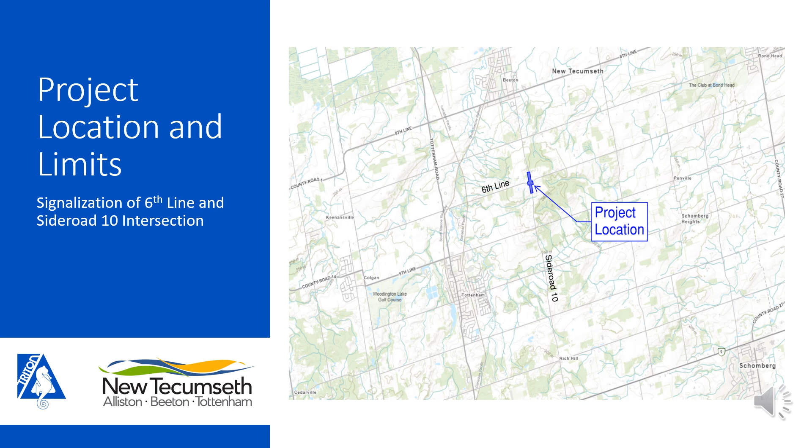The project is located on Side Road 10 at the intersection of 6th Line, just south of the community of Beeton. The limits of work measure approximately 500 meters on Side Road 10 to accommodate left turn lanes and approximately 100 meters on 6th Line.

The town undertook a municipal class environmental assessment in 2020 to identify and evaluate alternative intersection improvements at the intersection with the objective of reducing the potential occurrence and severity of accidents and collisions resulting from geometric and operational deficiencies within the study area. A link to the assessment documents is included on this slide.

The assessment concluded that impacts to the environment were too severe to improve the roadway to an arterial road design standard, including the minimum sight lines for a posted speed limit of 80 kilometers an hour. The recommended solution was to signalize the intersection to provide protected movement through the intersection and address sightline issues. Dedicated left turn lanes were also recommended to be constructed.

Side Road 10 is a 2-lane arterial road with a posted speed limit of 60 kilometers per hour within the project limits. 6th Line is a 2-lane minor collector road with a posted speed limit of 60 kilometers per hour within the project limits. The existing average annual daily traffic on Side Road 10 is 3,500 vehicles per day, and on 6th Line is 500 vehicles per day.

The road surface is in a deteriorated condition, and the town of New Tecumseth's 2018 Road Needs Study update, completed by R.J. Burnside and Associates Limited, has identified this section of Side Road 10 to be pulverized and resurfaced in the 1 to 5 year time frame. The link to the Road Needs Study is included on this slide.

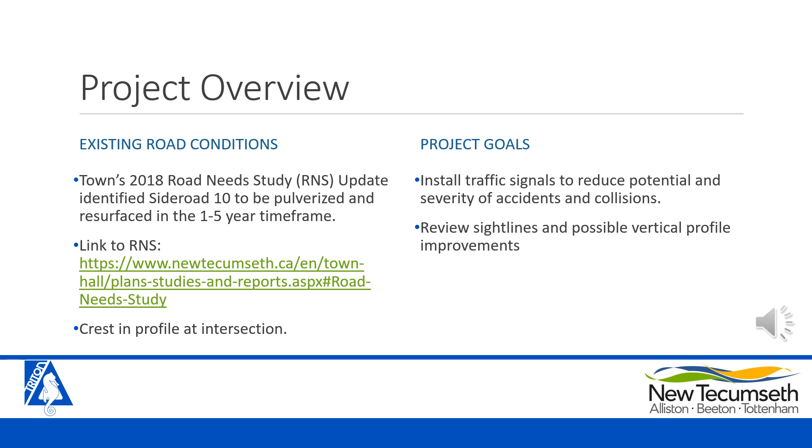There is a crest in the profile of Side Road 10 at the intersection. During design, a review of the profile was undertaken to see if any improvements could be made to the sight lines on the approaches to the intersection. The existing profile on Side Road 10 makes it difficult to turn from 6th Line onto Side Road 10 due to insufficient sight lines. The Municipal Class Environmental Assessment reviewed alternatives to revise the profile to meet standards for a 80 km/h design speed, but concluded that it would severely negatively impact the adjacent properties and environment.

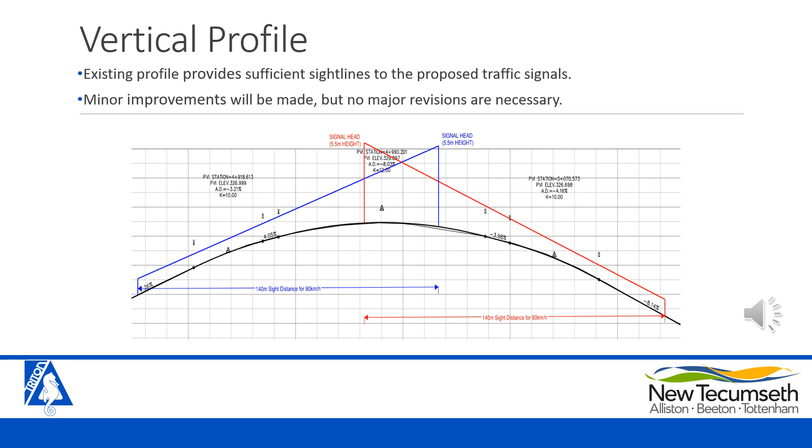As shown on this image, the existing profile will provide sufficient sightlines for an approaching vehicle to the traffic signal heads that are 5.5 meters above the ground. These sightlines do meet for an 80 km/h design speed, and no significant revisions to the profile are proposed.

Side Road 10 will be widened to accommodate left turn lanes at the intersection. The proposed road cross-section will follow the town standard for a 20-meter right-of-way, which includes a 3.5-meter lane in each direction, a 3.5-meter left turn lane, and a 1.2-meter fully paved shoulder on each side. A fully paved shoulder adds value to the road, reduces the maintenance costs, provides additional pavement width for cyclists and pedestrians, and will also provide extra pavement width for vehicles to pass large oncoming farm machinery.

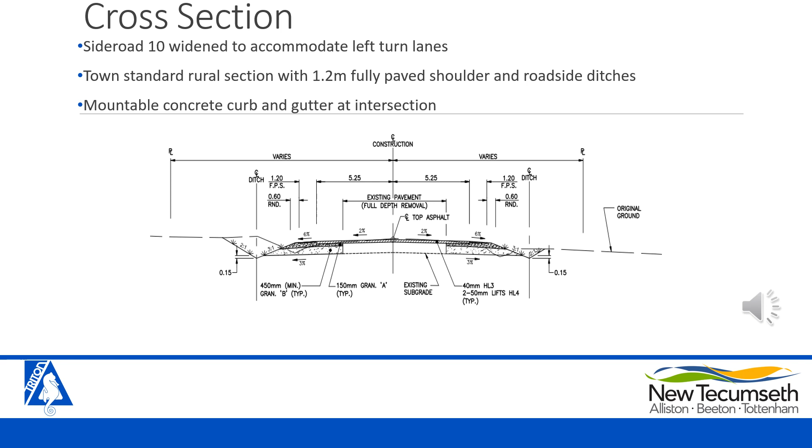The existing road asphalt will be pulverized and remain in place. The road widenings will be fully excavated with new granulars placed and compacted to accommodate the left turn lanes. Drainage will be provided by new roadside ditches and flow to the existing outlets. The typical section shown on the slide illustrates the new road in the area of cut. Additional typical sections are included on the design drawings. The intersection is proposed to have concrete mountable curb and gutter around the radii with asphalt boulevards behind the curb.

Concrete sidewalk ramps and tactile plates will be provided at each crosswalk. Crosswalks will be provided between each corner, and accessible pedestrian push buttons will be installed in accordance with the Accessibility for Ontarians with Disabilities Act.

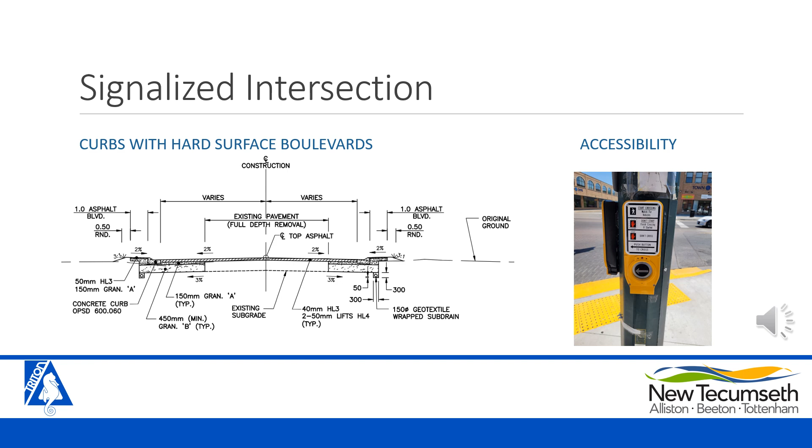The traffic signals will be set up so the green light rests on Side Road 10, and will only turn red when a pedestrian wishes to cross Side Road 10 by activating the push button, or a vehicle approaches and stops on 6th line. The existing wooden marker posts north of the intersection are proposed to be replaced with steel beam guide rail.

Each entrance was carefully reviewed, and the Ministry of Transportation Ontario standard was applied to include a backfall away from the new shoulder. If the wider road platform was causing too steep of an entrance grade, the length of the backfall was reduced to alleviate the issue. Where it was not possible to tie in at property line without increasing the grade above the town maximum standard of 7%, the entrance grading was taken beyond property line.

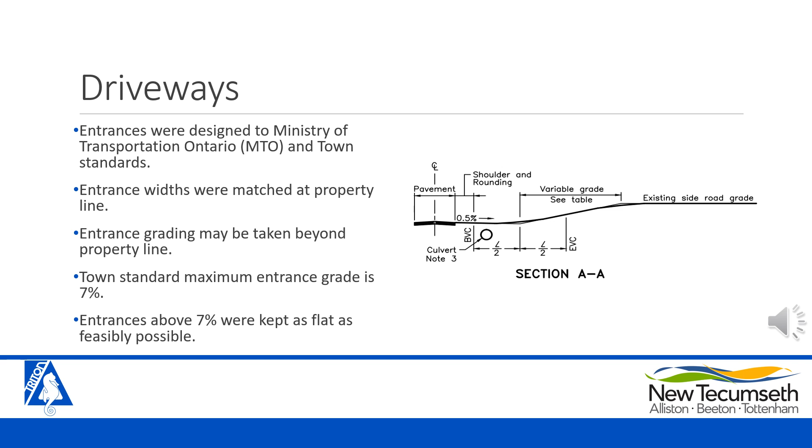In some cases where the grade exceeds 7%, efforts were made to minimize the grade change from existing conditions where feasible. The posted design drawings show a plan view of each entrance and include color to illustrate what material will be placed. Gray is used for asphalt and tan is used for gravel. All residential entrances will be paved with asphalt within the town's right-of-way.

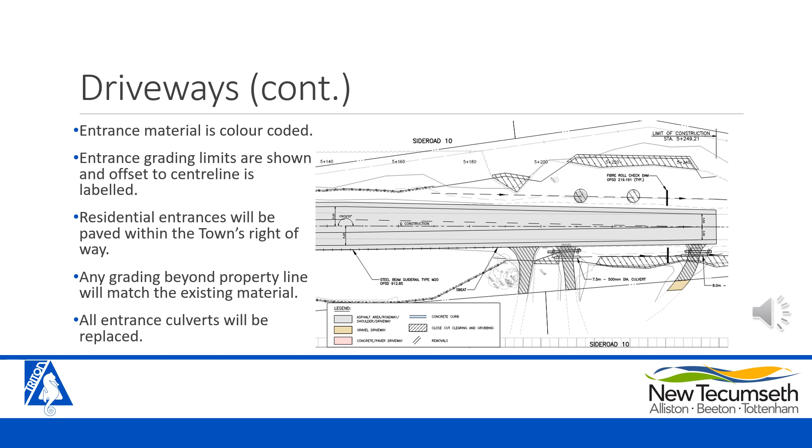If an entrance requires grading beyond property line, the material placed beyond property line will match the existing material of the entrance. If grading is required beyond property line, the town will circulate a permission to grade letter to affected property owners prior to construction for permission. All existing entrance culverts will also be replaced with new.

During the design process, conflicts were identified with Hydro One poles and underground Bell cables due to the wider platform resulting from the left turn lanes and ditching improvements. The process for relocating 3 hydro poles has begun with Hydro One, and it is anticipated to be completed prior to construction.

Daylighting of the Bell cable will occur to confirm its location and depths at location of potential conflicts. This is anticipated to occur in the coming weeks and will involve a vac truck creating a hole to expose the Bell cable and allow for measurements to be taken. The holes will be backfilled immediately.

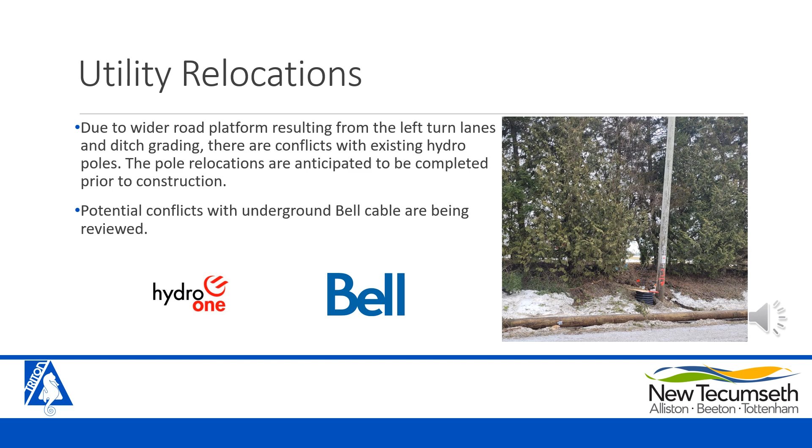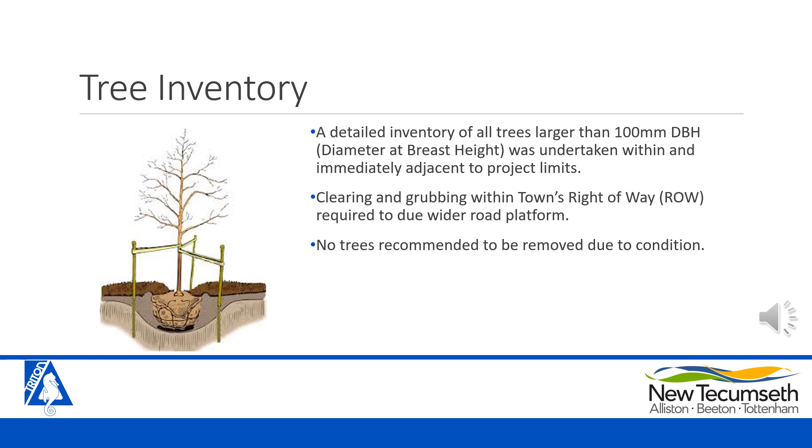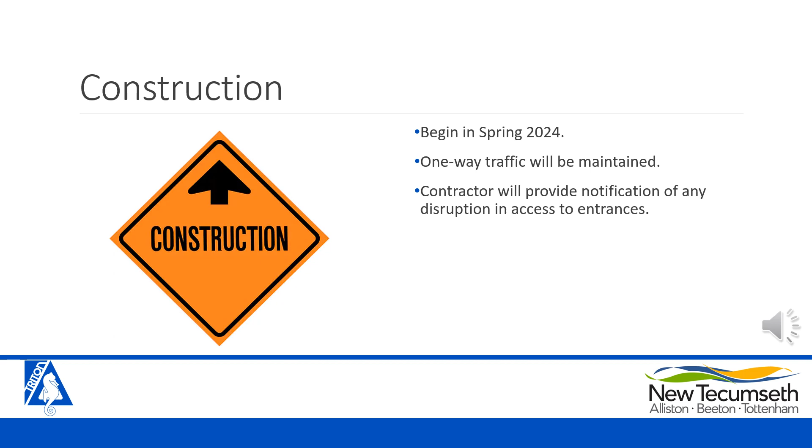Access to your entrance will be disrupted when the contractor is installing the new entrance culvert, constructing the new entrance, and constructing the road widening in front of your entrance. These disturbances will be kept to the minimum time required, and the contractor will notify you beforehand to make arrangements for anyone that needs access. Simcoe County waste collection services will be maintained throughout the duration of construction.

With the road remaining open, there are no anticipated impacts to the school bus route. If revisions to the route become necessary, they will be coordinated with the School Board Transportation Consortium. Additional details will be provided to residents if any revisions are necessary. Mailboxes and mail delivery will be maintained during construction. Mailboxes may require temporary relocation due to the road widening, but will be set to their permanent location at the end of construction.

The next steps in the project include preparing for construction. We will review all comments and questions submitted through this open house process and then finalize all contract documents for contractors to bid on the project. It is expected the project will be awarded in early 2024 and construction will begin in spring of 2024.